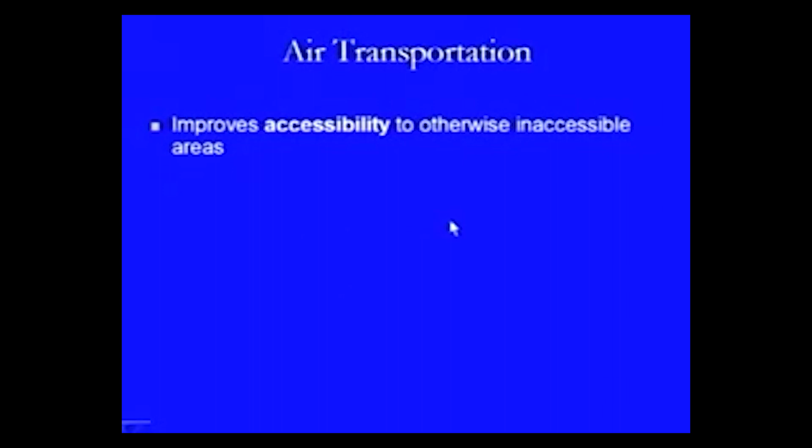Starting with air transportation. Air transportation is one system of transportation which tries to improve accessibility to otherwise inaccessible areas. So far we have read about highways or roads. We have then read in this lecture series about railways, another system which provides accessibility to certain remote areas, especially in mountainous regions. But still there may be some areas which do not have connectivity by road or by rail, and that is where air transportation comes into the picture.

It provides continuous connectivity over land and water, therefore there is no requirement of changing equipment as with other modes. When we use road transport and the land ends, we cannot use road transport and have to use water transport. This may be for inter-country or intercontinental systems, or within a city itself, like Goa or some parts of Kerala, where as soon as the road ends, we provide water connectivity through ferries, the whole vehicle is transported by ferry to the other side of the water body, and the road is used again. So there is a change of equipment in this scenario, whereas with air transportation there is no such change of equipment and it is a continuous connectivity.

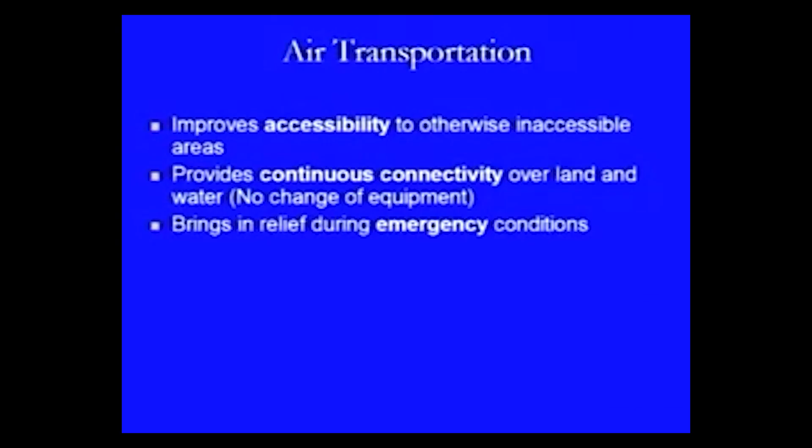Another thing is related to emergency conditions. In emergency conditions, air transportation is the best way to provide relief, as we have seen in flooding conditions, where we drop the food packets or medical boxes required in that area at that point of time. In similar conditions, air transportation may prove to be a better system compared to the other systems.

Then, because of its speed, it saves productive time, and there is no loss of productive time in the journey. That is another specific advantage, especially for those for whom time has much value. It also increases the demand for a specialized technical skilled workforce. Air transportation is mostly dependent on electronic gadgets, and therefore its workforce is more technical compared to other systems. So as soon as air transportation facilities are provided in any area, we are increasing the demand for technically skilled workforce.

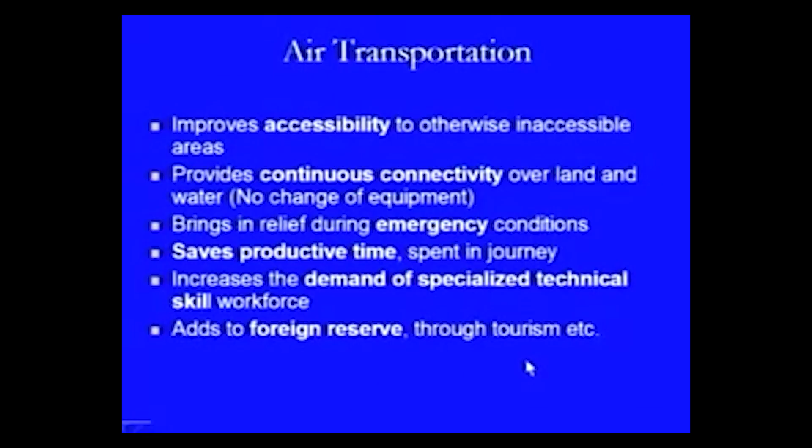It also adds to the foreign reserve. That is another added advantage of air transportation, because it helps in improving tourism facilities, and if there is a flow from outside, that will add to the reserve of the country.

Further, there are some problems associated with the air transportation system. Setting it up in any area requires heavy funds, and these heavy funds are continuously required. These funds are not required only at the time of providing the facilities, but during its operation as well as its maintenance a continuous flow of funds has to be made; only then can the system be maintained.

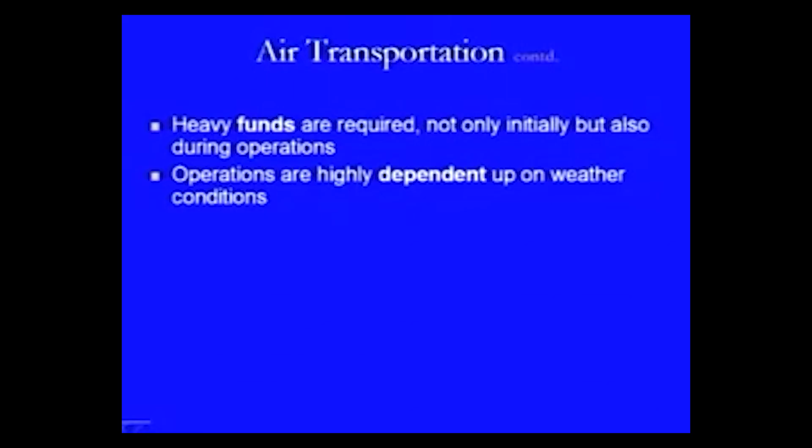Then operations are highly dependent on the weather conditions, as you must have seen nowadays, or in the previous conditions when there was winter and there was news coming on that there is a delay to the flight, or some flights have been cancelled because of flooding conditions like in Gujarat or in Mumbai or other parts of the country. So this is more dependent on weather conditions as compared to the other modes of transportation, that is road based or rail based transportation.

Further, it requires highly sophisticated machinery, and without that it cannot be safely and efficiently operated on all the routes being provided. It adds to the outward flow of foreign exchange in terms of getting the know-how related to this highly sophisticated machinery, or, the other way of looking at it, we have to purchase the big aircrafts from outside, and that creates the outward flow of foreign exchange.

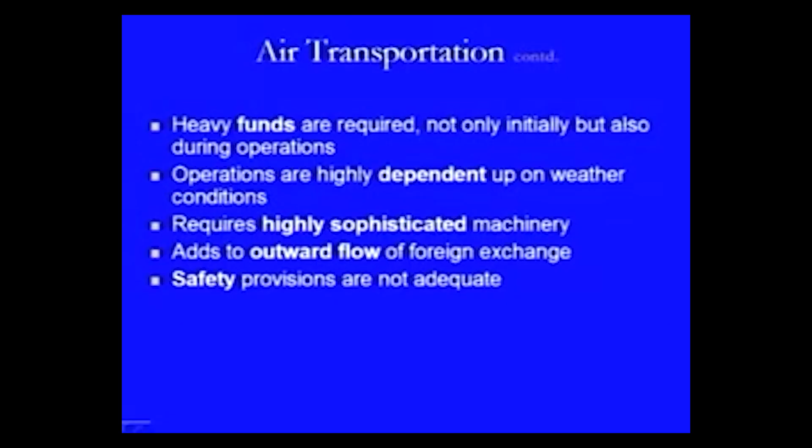Safety provisions is one of the biggest problems in air transportation, because there is no supporting system provided while the aircraft is in air. Therefore, if anything wrong happens to the flying aircraft, the biggest problem is the safety of the passengers or the freight being transported by that aircraft. So that is one of the biggest areas of concern.

Then specific demarcation of flight paths and territories is essential, so that there is no overlap of the flight paths, or no crossing of the flight paths at the same altitude, which may otherwise cause an accident. Like in the case of railway tracks, if there is any crossing, the pilot will not be able to know about those crossings at those particular altitudes, and if any aircraft comes from the other path, it will result in an accident.

And this has happened in the past, especially somewhere in Yugoslavia, where two aircrafts were coming from different flight paths, the flight paths were crossing, both pilots did not have the information regarding that movement, and finally the aircrafts collided in the air itself, killing all the persons on board. That is why it is very important to demarcate the flight paths and territories. If this is not done, it is going to be a very big safety hazard in this operation.

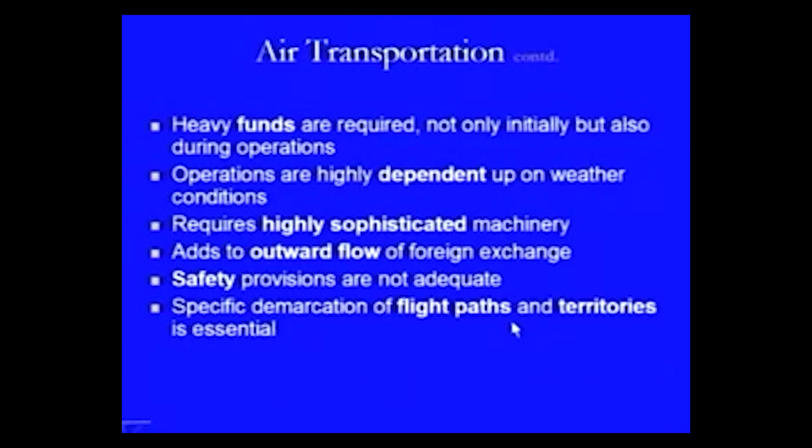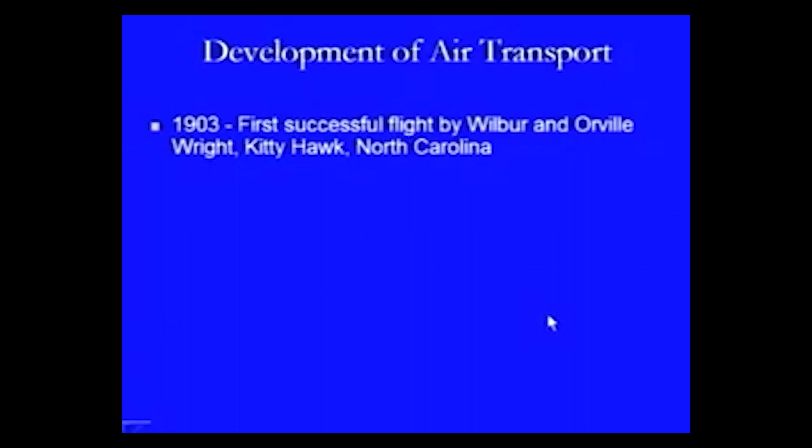Now, we will look at the development of air transport in the world. In 1903 the first successful flight was made by Wilbur and Orville Wright at Kitty Hawk, North Carolina. This is taken as the first successful flight by an aircraft, made by these two brothers. Then in 1909, a French pilot named Louis Blériot crossed the English Channel from France to England. This was six years after the first successful flight.

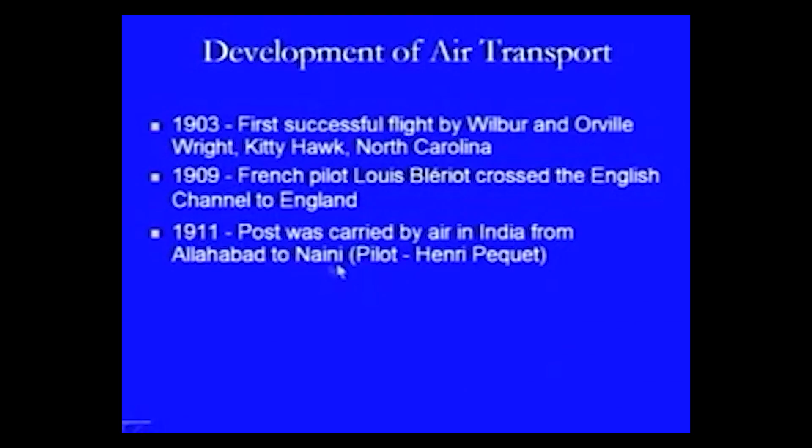Then in 1911 the post was carried by air in India from Allahabad to Naini. That was the first time an aircraft was operated in India, and Naini is just on the outskirts of Allahabad, so the first flight was between Naini and Allahabad, crossing the Ganga. Just in a span of 8 years, we had a flight in India, so probably we were one of the first to operate air transport flights, and the pilot was Henri Pequet. Then in 1912 the flight between Delhi and Karachi was operated.

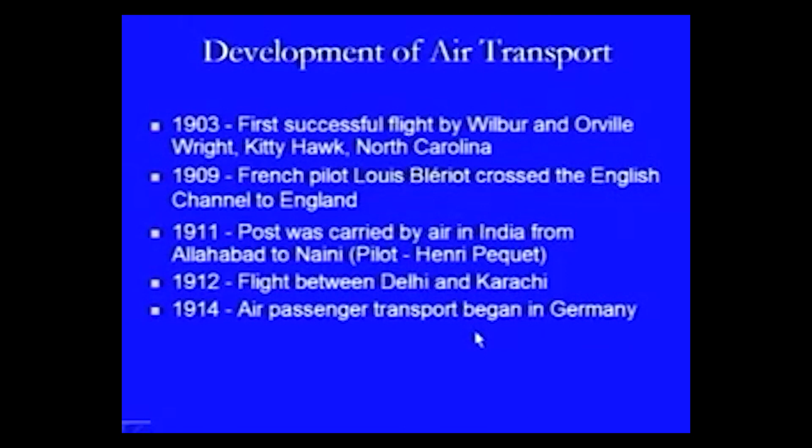Then in 1914 air passenger transport began in Germany, that is after India. And in 1918 the first international service between France and Spain was operated.

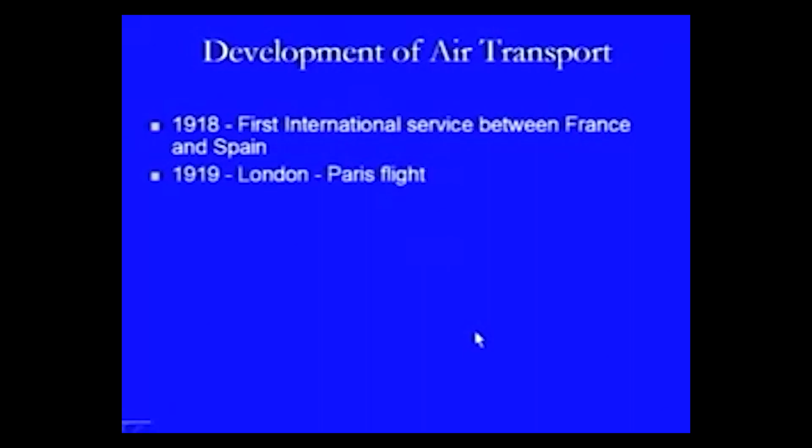In 1919 the London–Paris flight was inaugurated. Then in 1919 the International Commission on Air Navigation was established, abbreviated as ICAN, and it was for the movement of air transport. Looking at the number of air transport vehicles which were coming up by that time, it was felt necessary to have that type of commission to control it.

Further, in 1919 six European airlines formed one association named the International Air Traffic Association, IATA, and that was formed in the Hague. This was another effort to control the movement of aircraft by different airlines and to have a coordinated approach which is beneficial for all. It was mainly concerned with the objectives of the airlines as compared to the countries or the passengers.

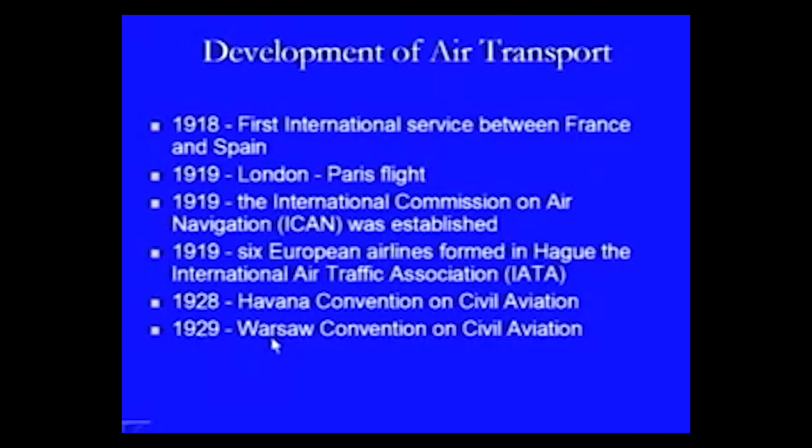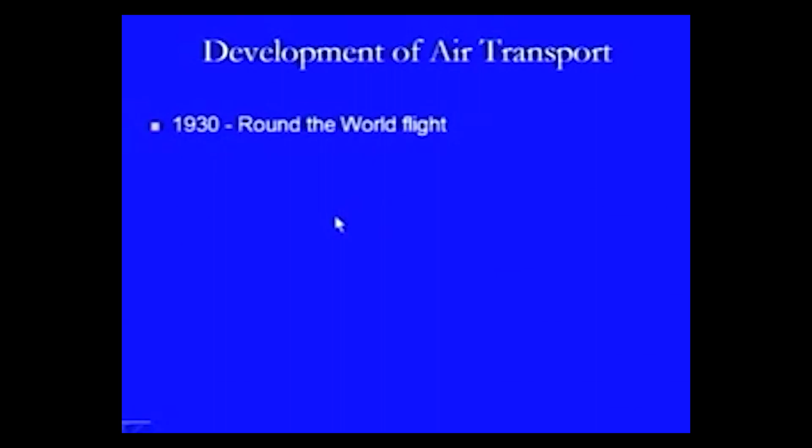Then in 1928 there was the Havana Convention on Civil Aviation, and this transformed into another convention in 1929, the Warsaw Convention on Civil Aviation. The effect of these conventions was that slowly we had a major body of air transport, which we will look at. But in between, in 1930, a round-the-world flight operated.

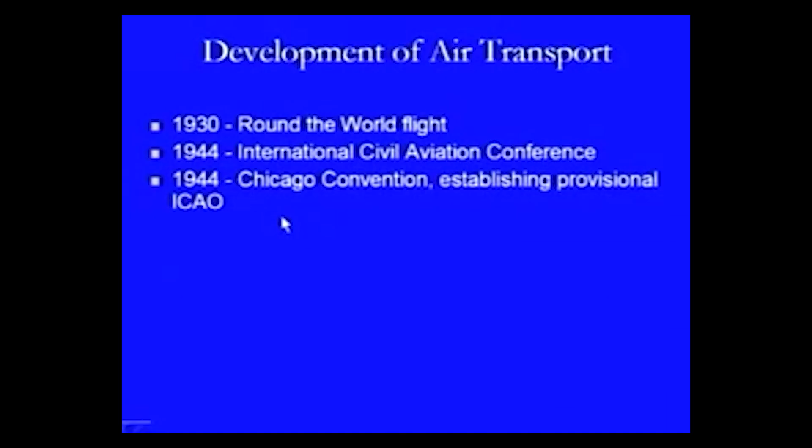Then 1944 saw the setting up of the International Civil Aviation Conference. This conference finally culminated into a body, and with the Chicago Convention it was established in a provisional form as ICAO, the International Civil Aviation Organization, a body which internationally controls civil aviation operations throughout the world, not military aviation, so that there is a coordinated effort between all countries to provide such connectivity.

In 1945 the International Air Transport Association, IATA, was established in a meeting at Havana, Cuba, as the successor. In 1947 the International Civil Aviation Organization was established as a body of the United Nations. Initially only the participating states in the conference agreed to establish it, but in 1947, after three years, it was incorporated as one part of the United Nations.

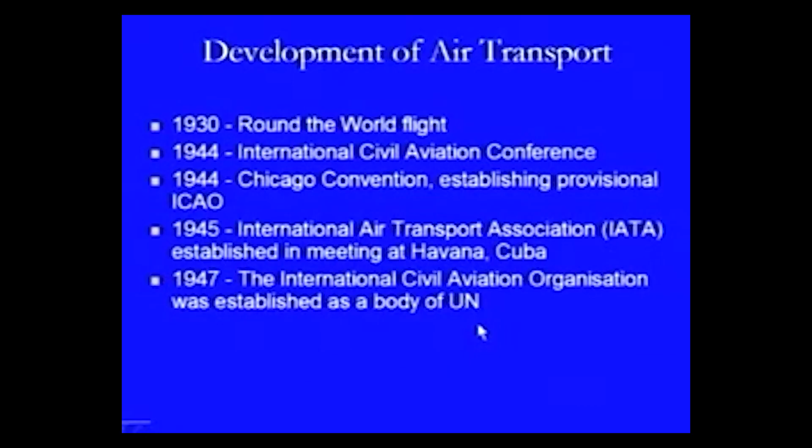Then on 27th July 1949 the world's first jet airliner, the de Havilland DH-106 Comet 1, made its first flight from Hatfield Airport just north of London, piloted by Captain John Cunningham to an altitude of 8,000 feet. Then 1954 saw the Boeing 367-80 prototype of the B707 make its first flight.

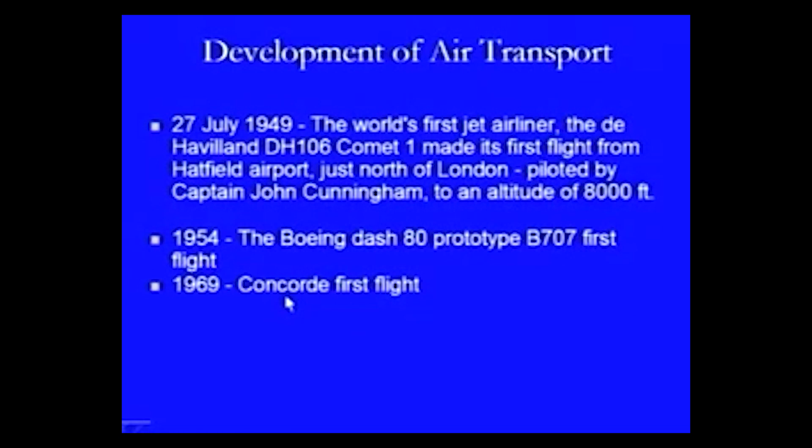Then in 1969 Concorde had its first flight. It had a peculiar, more aerodynamic design, and a cutting edge in terms of speed. Also in 1969 Boeing came out with another model named the B747-100, because within the 747 category they manufactured several models. So the 100 flew in 1969.

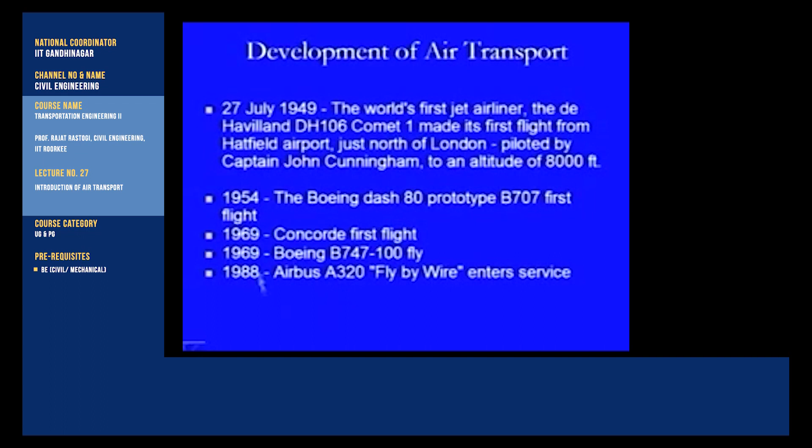Then coming to 1988 there was the Airbus A320, which was fly-by-wire, meaning it was controlled electronically, and it entered into service. And in 2006 the Airbus A380 took its maiden flight, and it also came to India. We will look at its dimensions when we discuss the various types of aircraft.

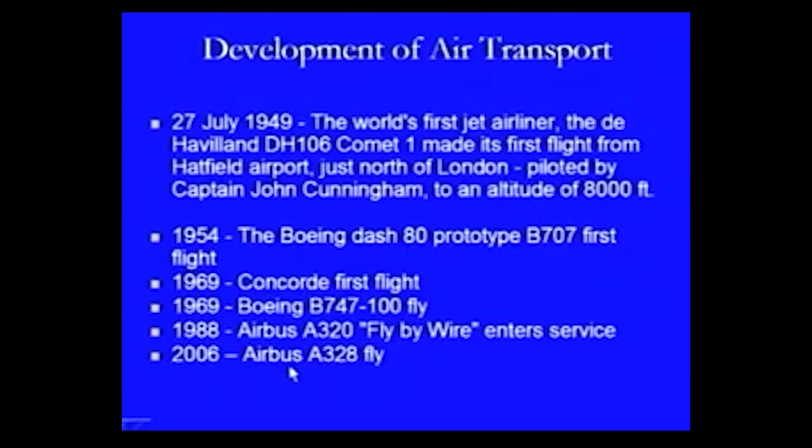This is one of the biggest passenger aircraft manufactured so far by any manufacturer like Boeing or Airbus, and it can seat up to about 800 persons.

Now we come to the development of air transport in India. In 1911 post was carried by air in India from Allahabad to Naini; as already discussed, the pilot was Henri Pequet. In 1912 there was a flight between Delhi and Karachi. In 1927 a civil aviation department was established to control flights. In 1929 there was a regular air service between Karachi and Delhi.

Then in 1932 Tata Airways Limited, a private airline, was set up. In 1933 Indian Trans-Continental Airways Limited was formed to provide connectivity between continents. By the end of 1938, 153 aircraft were registered in India. In 1946 the Air Transport Licensing Board was established because a number of companies were coming up with large fleets.

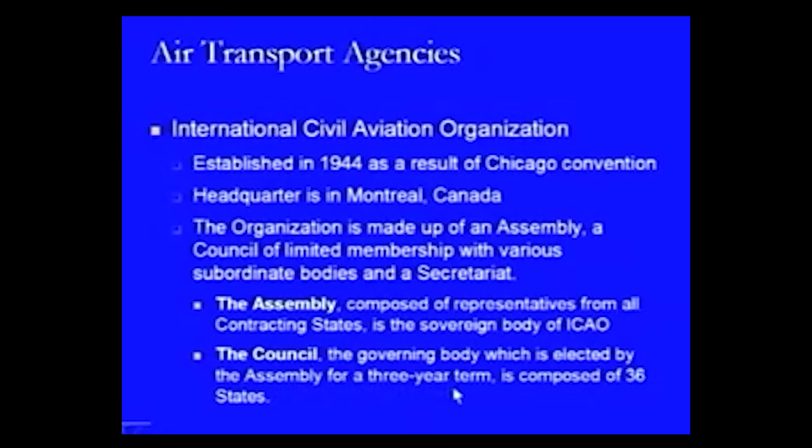The assembly is composed of representatives from all contracting states and is the sovereign body of ICAO, whereas the council is the governing body elected by the assembly for a 3-year term, and it is composed of 36 states. So, out of the total member countries of ICAO, these 36 are elected to the council for a 3-year term. And the secretariat is headed by a secretary general and is divided into 5 main divisions: the Air Navigation Bureau, the Air Transport Bureau, the Technical Cooperation Bureau, the Legal Bureau, and the Bureau of Administration and Services. So, this is how it is divided, and it works with the help of all these bureaus.

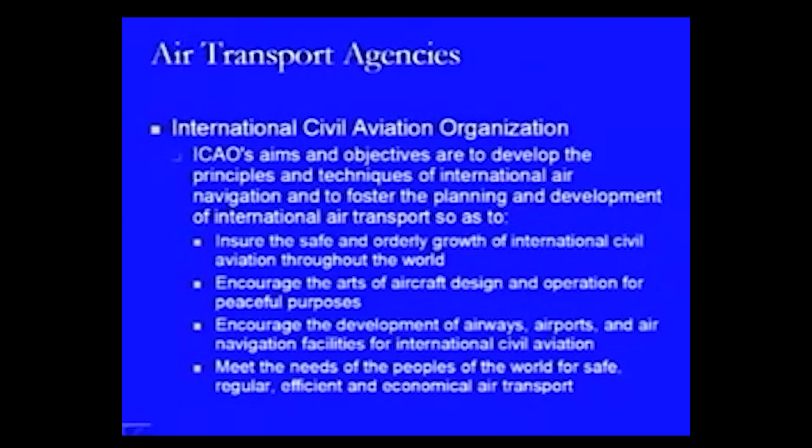Further, the aims and objectives of ICAO are to develop the principles and techniques of international air navigation and to foster the planning and development of international air transport so as to ensure the safe and orderly growth of international civil aviation throughout the world. That is one important thing. Encourage the art of aircraft design and operation for peaceful purposes, which relates to the manufacturing units. Encourage the development of airways, airports, and air navigation facilities for international civil aviation, that is, providing connectivity between nations and continents. Meet the needs of the people of the world for safe, regular, efficient, and economical air transport, meaning try to make this facility a mass-based facility as far as possible.

Further, so as to prevent economic waste caused by unreasonable competition, that is the controlling factor between the different airlines or the different countries or the private airlines which are operating at international level. So, that unreasonable competition should not result into a waste. So, the economics has to be dealt with.

Then ensure that the rights of contracting states are fully respected and that every contracting state has a fair opportunity to operate international airlines. So, that is again another controlling and coordinating factor between the different member countries or the member airlines of this organization.

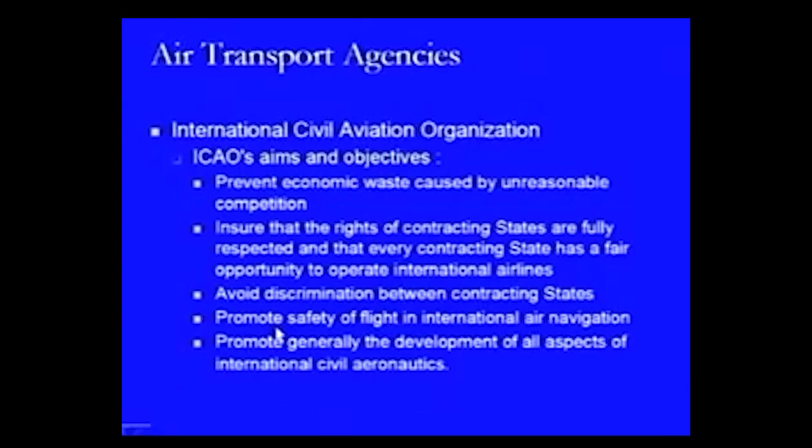And avoid discrimination between contracting states, that there should not be a bias as far as the movements in air, the provision of facilities and the use of those facilities are concerned. Promote safety of flight in international air navigation, promote generally the development of all aspects of international civil aeronautics. These are the aims and objectives of ICAO.

And this organization has established some strategic objectives for a 5-year time period of 2005 to 2010, and they are as follows: safety, to enhance global civil aviation safety; security, enhance global civil aviation security; environmental protection, that is minimize the adverse effects of global civil aviation on the environment;

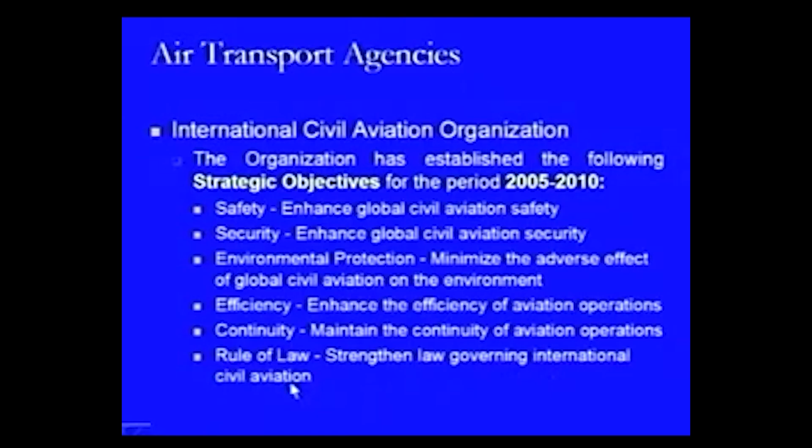efficiency, so as to enhance the efficiency of aviation operations; continuity, to maintain the continuity of aviation operations; and the rule of law, that is strengthen law governing international civil aviation. So, these are the points which it is giving more stress in this period, starting 2005 and ending 2010.

Then coming to another important agency which is working in the area of civil aviation design, operation and maintenance, the Federal Aviation Administration. This Federal Aviation Administration is a US body, and it was initially known as the Federal Aviation Agency. There are a number of functions which it is performing, like it encourages the establishment of civil airways, landing areas and other air facilities. It designates federal airways and acquires, establishes, operates, conducts research and development and maintains air navigation facilities

along such airways. So, it is completely involved in all of the processes which are required for the provision of facilities, starting from its planning to its execution and implementation. So, whatever aspects are there, it tries to provide its guidelines on all those aspects.

It makes provision for the control and protection of air traffic moving in air commerce. Obviously wherever the aviation agencies are there, they always look to control and protect the system, and it provides for aircraft registration, that is the registration within the country, that is US, not outside.

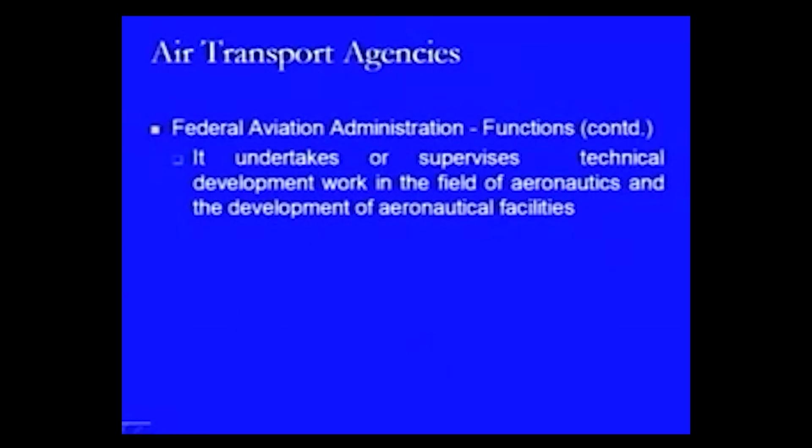Then there are some more functions: it undertakes or supervises technical development work in the field of aeronautics and the development of aeronautical facilities. So, that is towards the other side of air transport. It is not exactly passenger air navigation, but it is talking about the aeronautic conditions in terms of the profiles and in terms of provision of facilities towards space also.

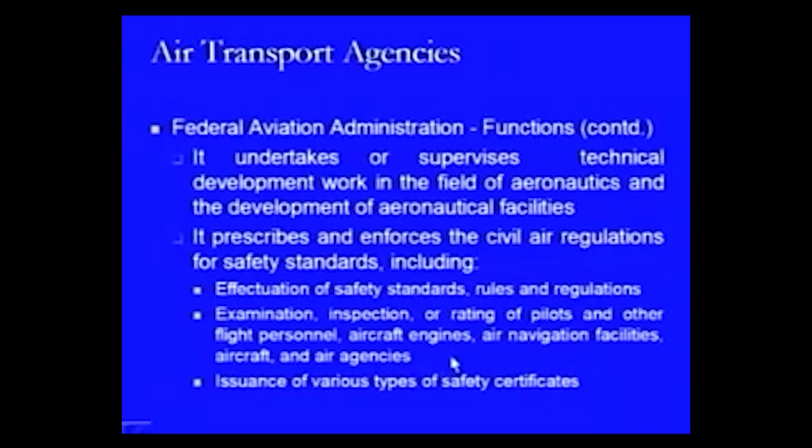Then it prescribes and enforces the civil air regulations for safety standards, and it includes the effectuation of safety standards, rules and regulations, the examination, inspection or rating of pilots and other flight personnel, aircraft engines, air navigation facilities, aircraft and air agencies again in US, and issuance of various types of safety certificates again in US.

Then it also requires notice and issues orders with respect to hazards to air commerce, and it issues airport operating certificates to airports servicing air carriers. So, these are some of the things which are being done by FAA in US, and many of its guidelines given in the area of planning, designing, maintenance and operation of facilities have been used by other agencies throughout the world, because most of the agencies do not have R&D facilities available to them.

Now, in India we have the Airport Authority of India, and this Airport Authority of India is controlling the overall air navigation here. It was constituted by an Act of Parliament, and it came into being on 1st April 1995, made possible by merging the two agencies which were working at that point of time at the national and international level, the National Airports Authority and the International Airport Authority of India.

Then this AAI, that is Airport Authority of India, manages 126 airports in the country, and out of these 126 airports, 11 are of international category, that is they are providing the international flights, 89 are domestic and 26 are civil enclaves, which are basically the defense airfields, but can also be used for passenger traffic movements. The international airports are at Ahmedabad, Amritsar, Bangalore, Goa, Guwahati, Hyderabad, CIAL Private, Mumbai, Delhi, Calcutta, Chennai and Thiruvananthapuram.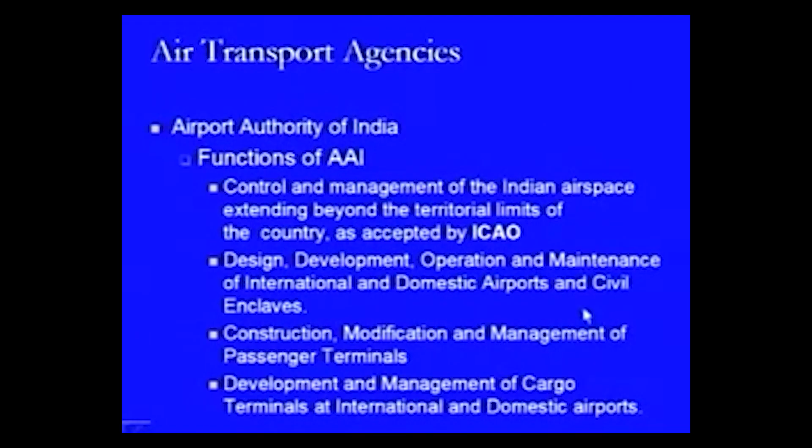Then there are certain functions which AAI is looking at. They are the control and management of Indian airspace extending beyond the territorial limits of the country as accepted by ICAO, means it is working in coordination with ICAO and it looks and controls and manages the overall airspace being provided to India. Then design, development, operation and maintenance of international and domestic airports and civil enclaves, construction, modification and management of passenger terminals, development and management of cargo terminals at international and domestic airports. So, these are some of the functions.

Now, we look at another airport agency in India, that is Director General of Civil Aviation, and this Director General of Civil Aviation is basically an attached office of Ministry of Civil Aviation, and this is the regulating body in the field of civil aviation, primarily dealing with safety issues. The headquarters are located in New Delhi, with regional offices being provided in different parts of India. There are 14 regional airworthiness offices, 5 regional air safety offices, the regional research and development office, that is RRDO, located at Bangalore, and the gliding center at Pune.

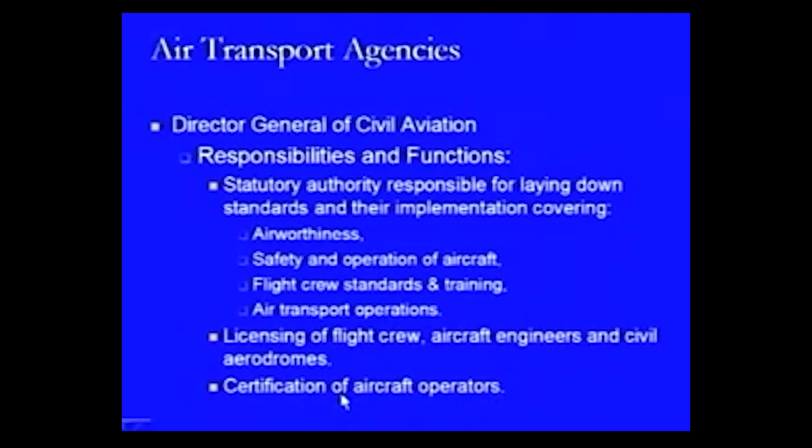Then there are some responsibilities and functions of the Director General of Civil Aviation, like it is a statutory authority responsible for laying down standards and their implementation, which covers airworthiness, safety and operation of aircraft, flight crew standards and training, air transport operations. Then another thing is the licensing of flight crew, aircraft engineers and civil aerodromes, the certification of aircraft operators. Some of the things we can see are synonymous with the functions and responsibilities which we have seen in FAA.

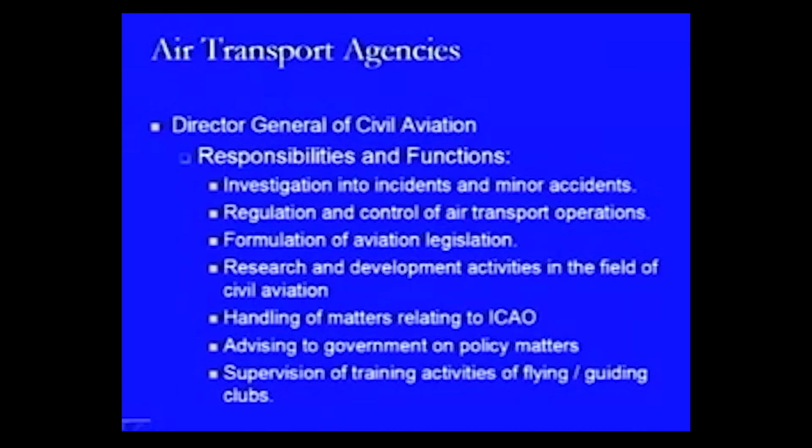Then further it has the responsibility of investigation into incidents and minor accidents, regulation and control of air transport operations, formulation of aviation legislation, research and development activities in the field of civil aviation, handling of matters relating to ICAO, advising the government on policy matters, and supervision of training activities of flying or gliding clubs. So, these are different responsibilities and functions with which it is working.

Now, another agency which is providing the operational facilities in India. Basically the previous two agencies which we have seen, AAI and Director General of Civil Aviation in India, they are the administrative sort of agencies which are trying to provide the guidelines and controlling the overall system. Indian Airlines Corporation, which is now named as Indian, is the operational wing, and it came into being in 1953 with the enactment of the Air Corporation Act, and it is providing air transportation within the country as well as to some of the neighboring countries.

And it started after merging 8 private airlines which were operating at that point of time. At the time of nationalization, Indian Airlines inherited a fleet of 99 aircraft. So, it started with 99 aircraft at that point of time, which came from the 8 private airlines. Between 1970 and 1982, Indian Airlines started inducting its first batch of wide bodied Airbus, and that was A300 aircraft. So, this A300 aircraft was inducted between 70 and 82.

Then its latest acquisition is the Airbus A319, which was inducted in December 2005. This is another Airbus which they have purchased and is operating with Indian Airlines Corporation. It has also placed orders for 43 new aircraft, out of which 19 are A319s, 4 are A320s and 20 are A321s. These are the numbers of the Airbuses.

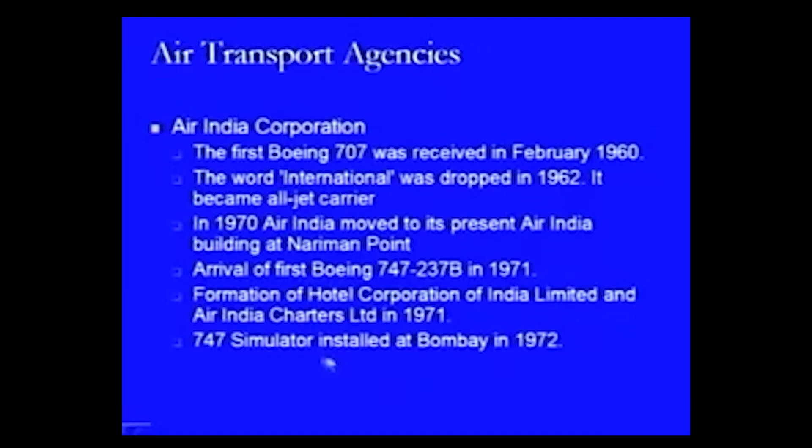Formation of Hotel Corporation of India Limited and Air India Charters Limited in 1971. So, Air India is also operating its own hotels, known as the Hotel Corporation of India, and then the 747 simulator was installed at Bombay in 1972, because of the arrival of the Boeing 747. The simulator was installed so that the pilots can be given training, and that is how they can operate the 747 in India. Then Air India's first hotel, Centaur, was opened in Bombay in 1972. That was under Hotel Corporation of India Limited.

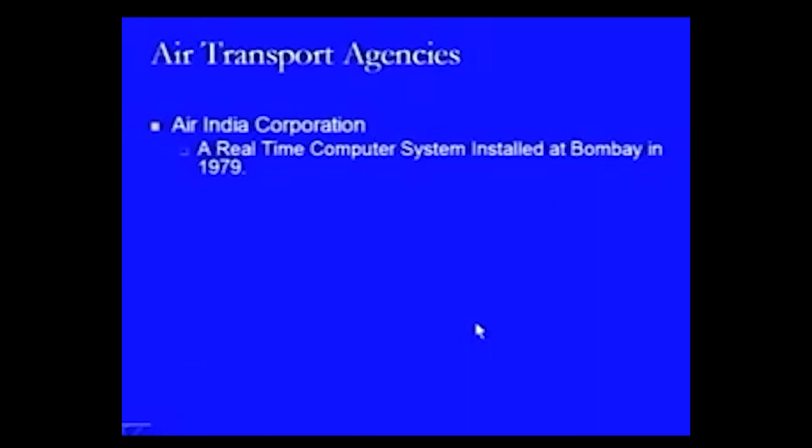Then a real time computer system was installed in Bombay in 1979, again with respect to providing the pilots an atmosphere and environment in which they can understand the complexities of air transportation. The new international airport terminal was opened at Bombay in 1980. Then a computerized passenger reservation system was introduced in Bombay in 1981. Then Air India purchased 3 Airbus A300 B4s in 1982. That was enhancing the passenger capacity available with Air India at that time.

In the second phase, 6 A310-300s were ordered in 1985 for induction into the fleet by 1986. Then Indira Gandhi International Terminal was opened at Delhi Airport in 1986. Then a computerized departure system was installed at Bombay in 1986. Then the Boeing 707 was withdrawn from service. That was the first Boeing which was purchased, and that was the first jet plane which came into service with Air India. So, that was taken out of service in 1986.

Then the Airbus A310-300 was delivered in 1987 by the Airbus company. The airline acquired 2 more Boeing 747-300 Combis. Combi is the name given because it can handle both passengers and cargo. So, if it is mainly handling passengers, it is a different category than if it is mainly handling cargo, and this was acquired in 1988.

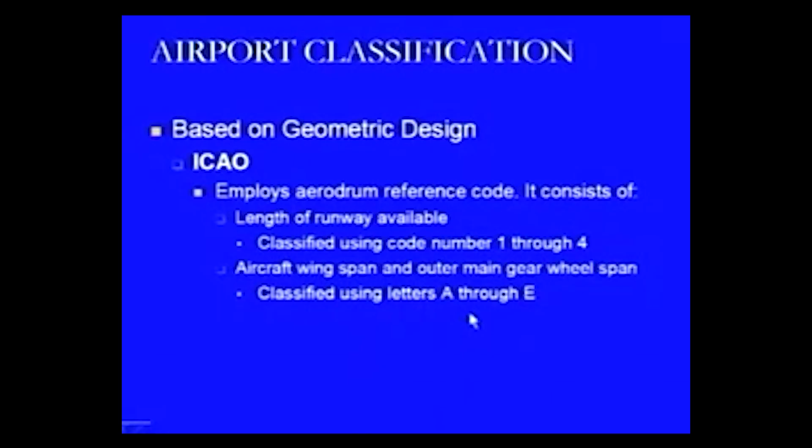Then based on geometric design, the ICAO classification system employs an aerodrome reference code, and it consists of 2 things. One is the length of the runway available, classified using code numbers ranging from 1 to 4, and the other is the aircraft wingspan and outer main gear wheel span, based on which it is classified using letters A through E. We look first at the classification based on the length of the runway.

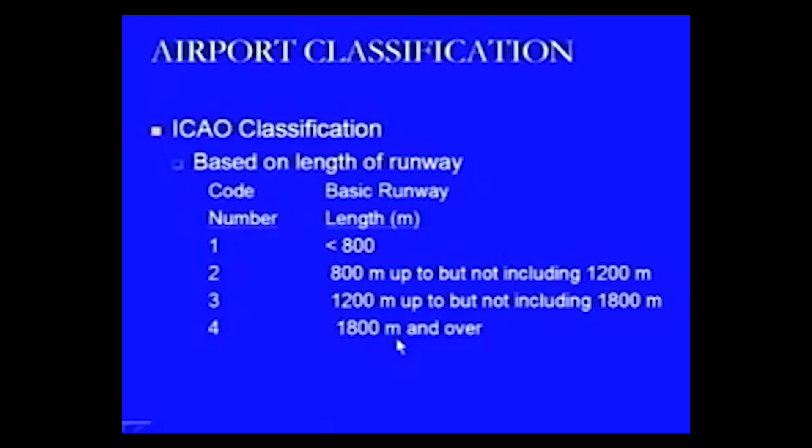We have the code number and the basic runway length. If the code number is 1, the basic runway length is less than 800 meters. If it is 2, it is 800 meters up to but not including 1200 meters. If it is 3, it is 1200 meters up to but not including 1800 meters, and the fourth category is 1800 meters and over. So, that is the classification of airports on the basis of runway length as per the guidelines given by ICAO. Then further,

we have the classification on the basis of wingspan and outer main gear wheel span, with the code letters A, B, C, D, and so on. In the case of category A, the wingspan is up to but not including 15 meters, whereas the gear span is up to but not including 4.5 meters. Then for B, it is 15 meters up to but not including 24 meters, and 4.5 meters up to but not including 6 meters for the outer main gear wheel span.

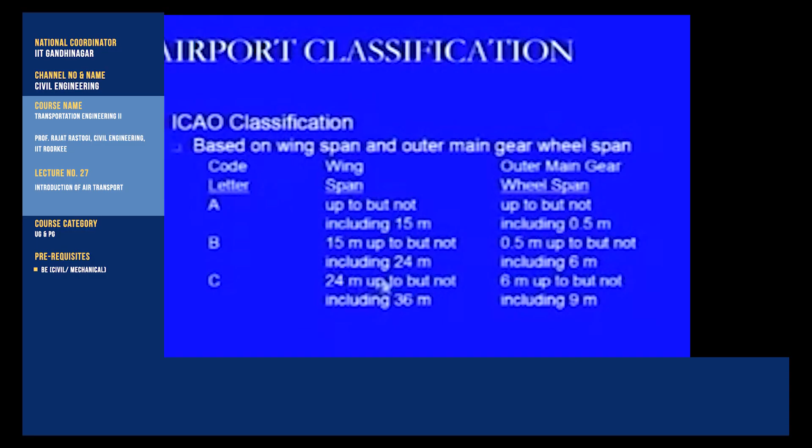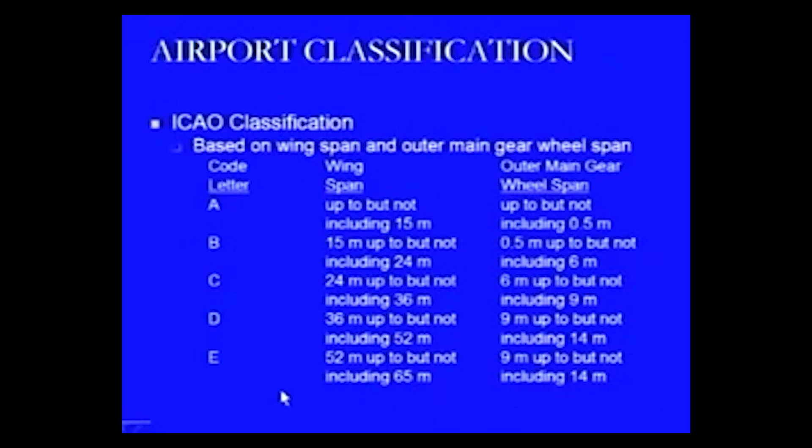Then C is the other category, which is 24 meters up to but not including 36 meters. We see that the wingspan keeps on increasing like this, which means we are talking about a bigger aircraft, and with respect to that we require a higher runway length. Here the outer main gear wheel span is 6 meters up to but not including 9 meters. In case of D, it is 36 meters up to but not including 52 meters for the wingspan, and 9 meters up to but not including 14 meters for the gear span. Then the E category is 52 meters up to but not including 65 meters for the wingspan, and 9 meters up to but not including 14 meters for the gear span.

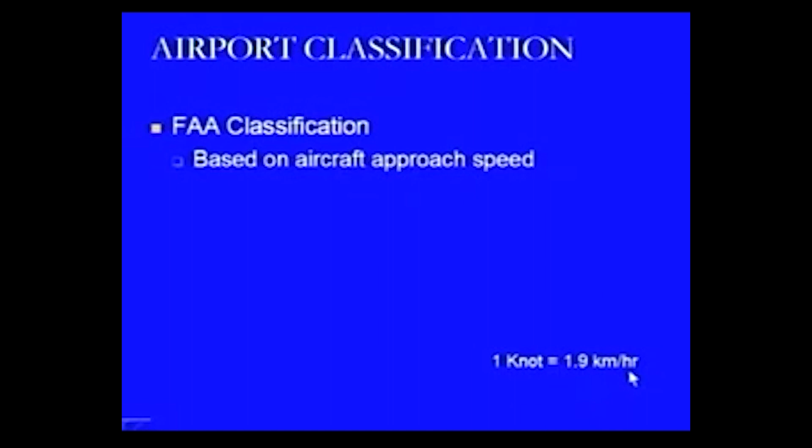Now we come to another classification system of the airports, which is given by the FAA, that is the Federal Aviation Administration, and here it is in terms of the aircraft approach speed, which is generally given in knots, and 1 knot is equivalent to 1.9 kilometers per hour.

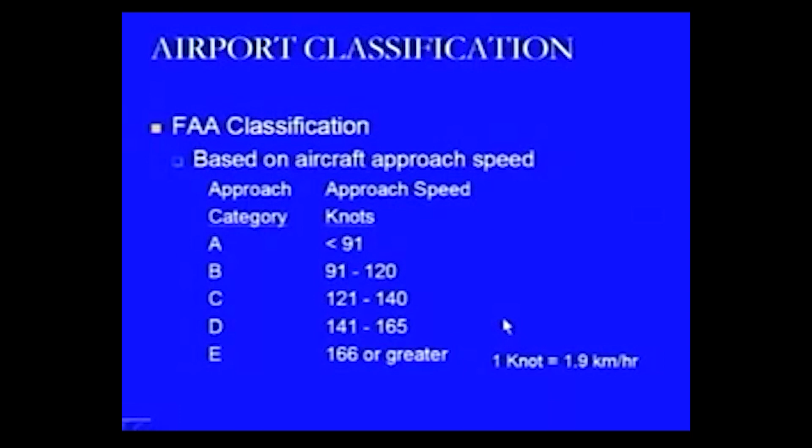So in terms of approach category and approach speed in knots, category A is for less than 91 knots, category B is for 91 to 120 knots, category C is from 121 to 140 knots, category D is from 141 to 165 knots, and category E is for 166 or greater knots. So, that is one way of classification by FAA.

Then based on function also we can classify the airports in terms of civil aviation airports, and within civil aviation airports the classification can be on the basis of the type of flights being provided, that is whether the flights are provided at the international level, providing connectivity between countries or continents, which is international civil aviation, or flights provided within a country, which is known as domestic civil aviation. So, on the basis of function we can have international and domestic civil aviation airports.

That means there are some airports which may be providing only domestic flights, but there can be other airports which are providing either international flights only, or a combination of international and domestic flights, depending on whether they have the size by which we can segregate the two types of flights within the same airport.

Then there is another type, that is military aviation, which is related to the military or strategic needs of protecting a country and providing the strategic weaponry in terms of the striking area from where our army can provide the teeth by which they can defeat the enemy. So, that is totally dependent on military aviation conditions, but still, wherever such airports are provided, there is always a possibility that if required, passenger flights can also be provided at those airports.

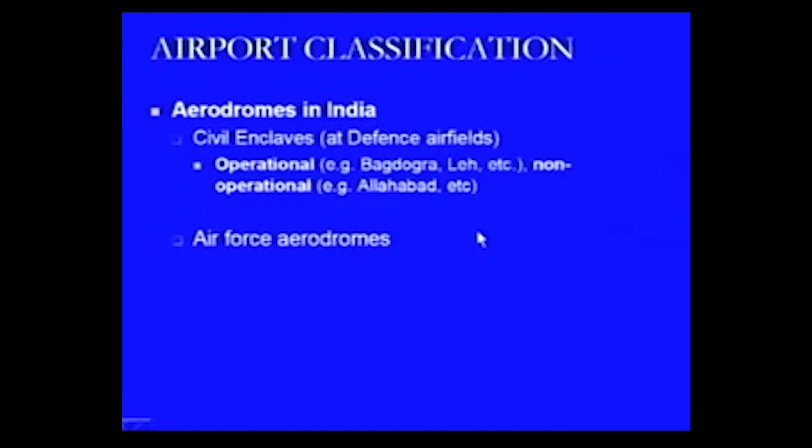And then there are Air Force aerodromes which are totally under the control of the Air Force of India, and sorties are done by fighter planes from these aerodromes, and passenger movements are not allowed from these airports, considering their safety and security concerns and their strategic value. So, that is another category of aerodromes. That is how we have classified the airports.

So, students, in today's introductory lecture on airports and air transport, we have seen the development of air transport in the world as well as in India, and then we looked at some of the important agencies working globally or within our country to control air navigation and provide guidelines for their operation. And finally, we looked at the classification of airports given by the 2 prime agencies, that is ICAO and FAA, based on certain criteria, and the way aerodromes have been classified in our country, India.

That is where we will be stopping in this lecture, and we will be continuing with the other aspects of air transportation in the next lecture.